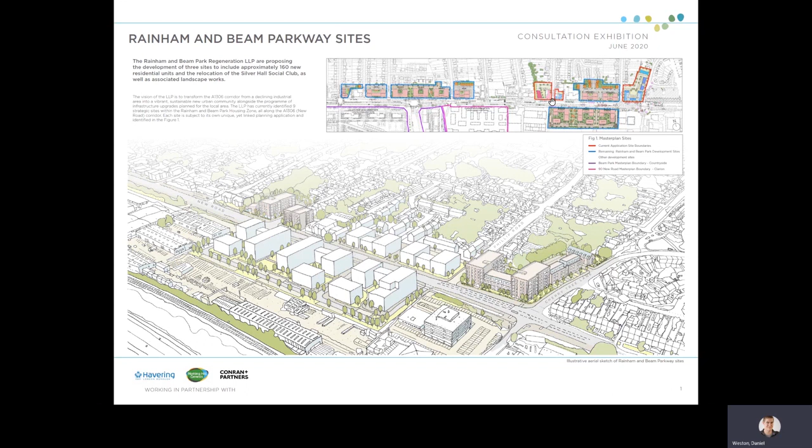Rainham Beam Park has been identified as one of the GLA's new housing zones. To progress considered development, the Council published the Rainham Beam Park Planning Framework. That included an illustrative outline master plan for the area to provide a guide for change. This incorporated the historic heart of Rainham and extended west along the New Road corridor towards Beam Park.

The proposal sites are situated within the Beam Parkway character area, one of 6 identified in the framework to be established to create a well-defined, coherent residential urban area. It's the vision of the LLP to develop the Rainham Beam Parkway sites to transform the Beam Parkway corridor from a declining industrial area into a vibrant, sustainable new urban community as part of a wider regeneration.

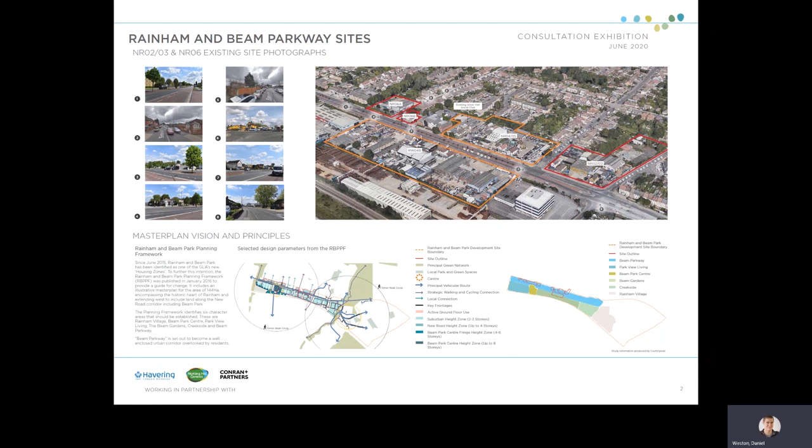The proposal sites currently benefit from close proximity and good access to open spaces and amenities, as well as transport links including bus stops right on the doorstep and a short walk to Rainham Station. The improvements to the area included the new Beam Park station, the A1306 Beam Parkway, which incorporates the linear park, as well as community and commercial facilities coming forward as wider master plan sites, means new residents will have the benefit of a wide range of facilities and will knit into the existing community.

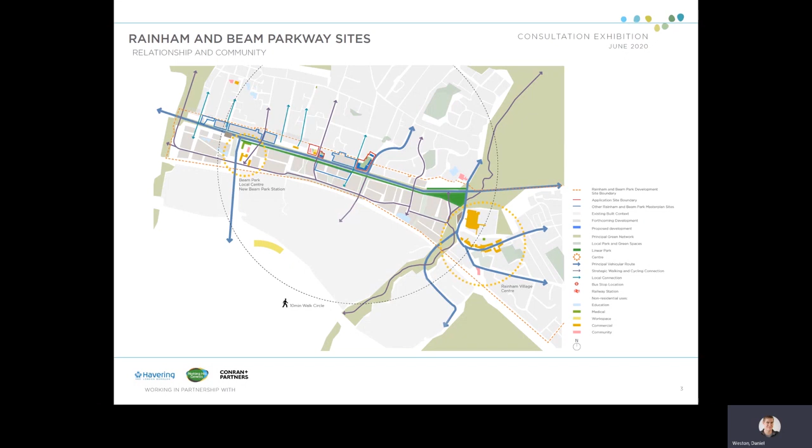This will further be enhanced by the benefits our proposals will deliver, which include a new multi-purpose community building for the relocated Silver Hall Social Club and a commercial space suitable for a wide range of uses. A pocket park as well as urban greening will link into the new linear park development.

The design strategy has developed from key design principles established by the outline plans. These included creating focal buildings at junctions, using height and building line variation to create clear order and visual interest, and ensure a stepping of scale from the Beam Parkway sites to the existing neighbouring homes.

As previously mentioned, the relocation of the Silver Hall Social Club is an important inclusion to the proposals and reason for change to the outline plans. We've also refined the layouts in close consultation with the local planning authority as well as the design review panel.

Looking from left to right on the illustration of the proposals, the 143 New Road site has the new single-storey social club, providing an active frontage to New Road. A pocket park then separates the club from the residential apartment block with a commercial space at its base. The site on the opposite side of the road consists of an apartment block which creates bookends at either side of the Betterton Road junction.

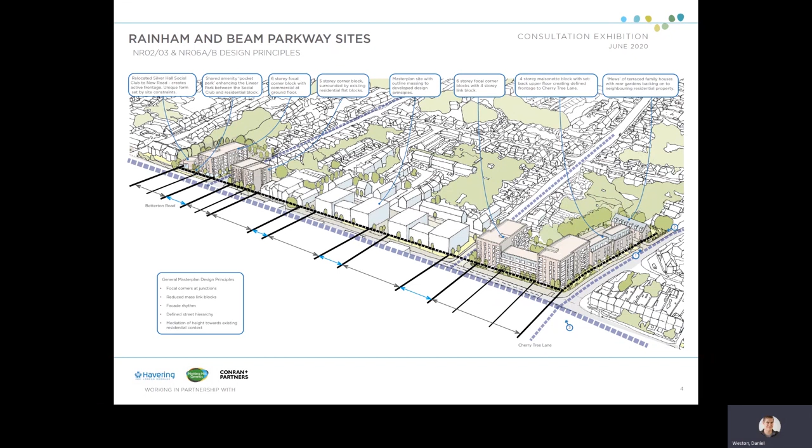The Cherry Tree Lane junction application site has bookend apartment wings linked by a lower rise apartment block in the centre with amenity space to the rear. A lower maisonette block runs along Cherry Tree Lane and a new terrace of houses back on the neighbouring house.

These sketches illustrate the proposed massing from street level. On the left, looking north up Cherry Tree Lane, is the end of the maisonette block with driveways and front doors to the street. The top floor is set back to reduce the sense of scale.

Access to the site is overlooked by the front of the proposed terrace of houses. These are 2 stories with a dormer window at the rooftop.

The image at the bottom right looks south down Cherry Tree Lane and illustrates how height gradually steps up from the neighbouring homes to the focal corner at the junction of New Road. This is depicted above, with a new building creating a strong identity for the new Beam Parkway area.

Robust traditional materials will be used, predominantly brick, with colours inspired by the reds and browns of Rainham Village.

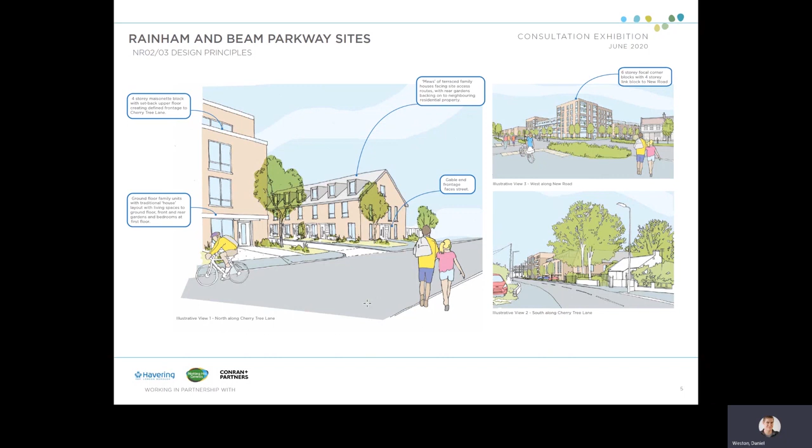This rotated plan, with New Road along the left and Cherry Tree Lane along the bottom, illustrates the current layout and mix of the Cherry Tree Lane Junction application site.

1, 2 and 3 bedroom private sale and shared ownership flats sit within an apartment block which has generous communal entrances off New Road. All flats have private amenity in the form of ground floor terraces or balconies to upper floors.

The maisonette block, consisting of all affordable homes, provides ground floor 2-storey 3-bedroom maisonettes which have a traditional layout including a front and back garden.

2-bedroom maisonettes sit above and have a generous top floor terrace.

The run of 3-bedroom houses creates a terrace along the edge of the site which back onto the neighbouring house and have generous rear gardens.

Parking is located to the rear of the site with through access as considered appropriate by the Highways Department. Additional pavement space is provided around the bus stop to Cherry Tree Lane.

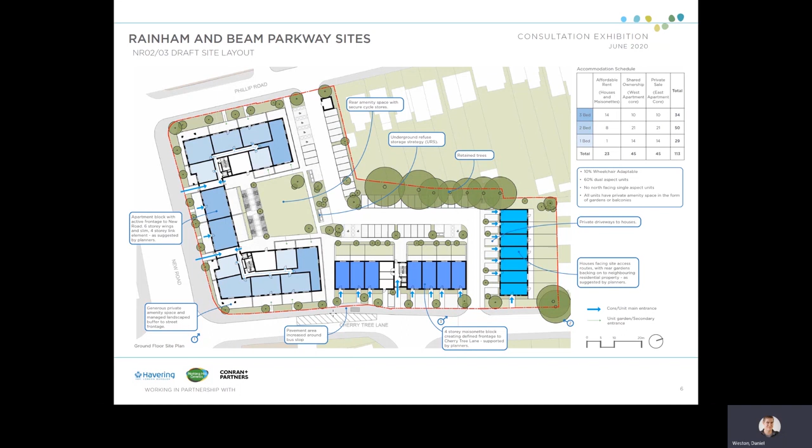Building frontages are set back from the street, creating space for managed landscaping as well as private terraces and access to the ground floor of homes.

The shared amenity courtyard is nestled within the apartment block with access for all residents.

Parking capacity is being carefully balanced with landscaping, and the design team is working closely with the local planning authority and highways to strike the right balance. We're reviewing alternative options to ensure future-proofing for the scheme.

Existing boundary trees are maintained, as well as new additional tree planting throughout the site.

An underground refuse system, URS, is used and supported by the Council's collection strategy. This keeps waste hidden below the ground and is located conveniently for residents who access it using a chute.

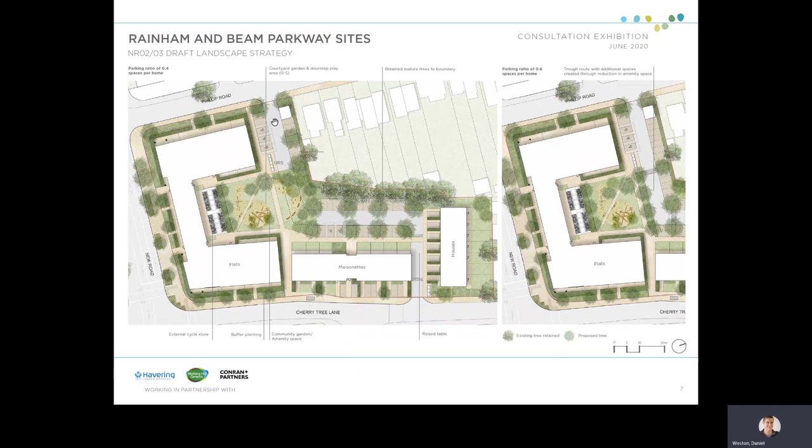It's adjacent to the parking area to the rear, and refuse trucks access the site away from the street to collect.

Complex site constraints on 143 New Road, which include the culvert, sewers, as well as localised flood risk, has prevented residential use at ground floor and defined where building footprints can sit.

The new social club fronts onto New Road with its own dedicated parking to the rear, along with access. We're working closely with the club members to develop the layout and create a flexible and inclusive space.

A commercial space, which could become a shop, food outlet or office space, sits below 1, 2 and 3 bedroom flats. An amenity space separates the uses at the centre of the site, and a residential parking court is also included at the rear, separating from neighbouring properties.

A smaller apartment block, 149 to 153 New Road, consists of all shared ownership flats. These are accessed off New Road and have parking and amenity to the rear.

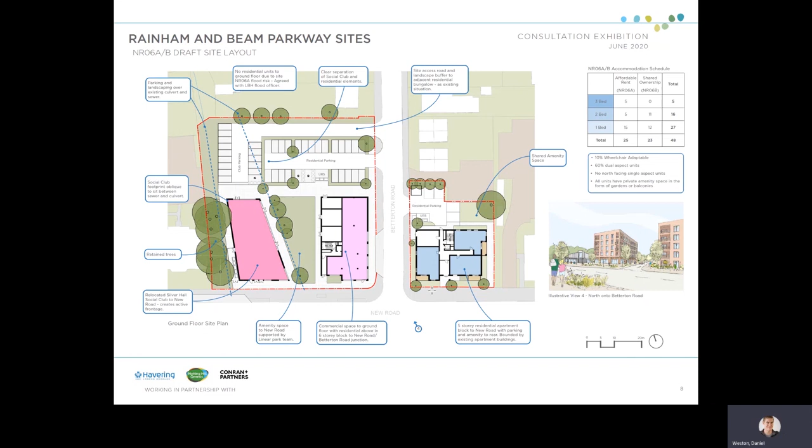Existing culvert to the western boundary, along with existing trees, will be tidied up to create a biodiverse strip of green land. The parking areas are tree-lined to create a buffer to the neighbouring homes.

There's ample play space for young children's play within both of the sites for new residents, as well as places for adults to sit and relax.

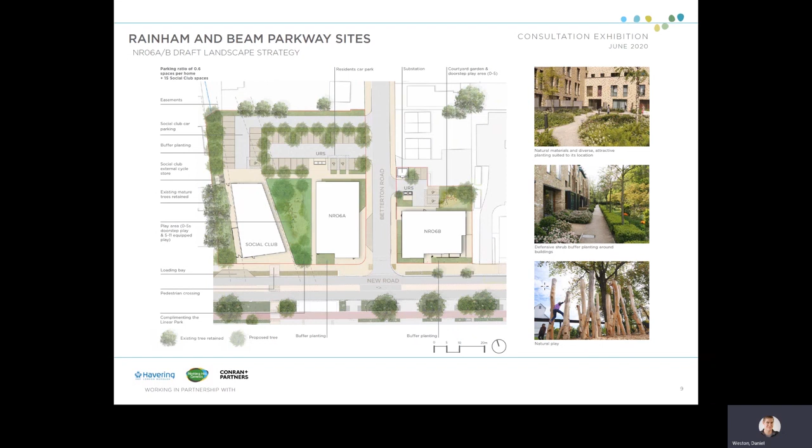We have already met extensively with stakeholders, consultees and the local authority. This process will continue in upcoming months as we develop the design and target a submission in August.